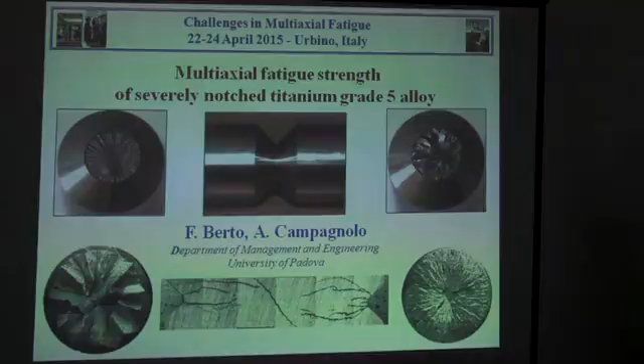The title of my presentation is Multiaxial fatigue strength of sharp-notch specimens made of titanium. I would like to say that this work was started under the supervision of Professor Paolo Lazzarin, who was my supervisor during my PhD, and also my chief when I worked at the University of Padua. He is in collaboration with the last PhD student of Professor Lazzarin, Alberto Campagnolo.

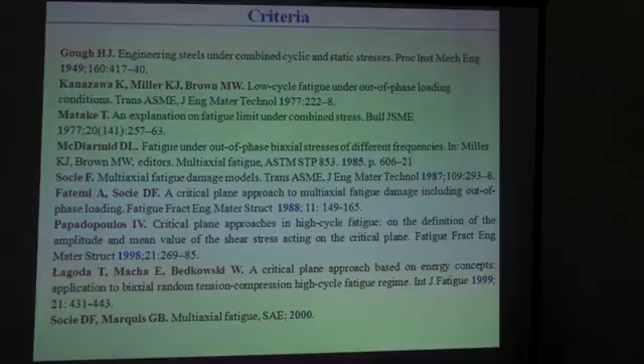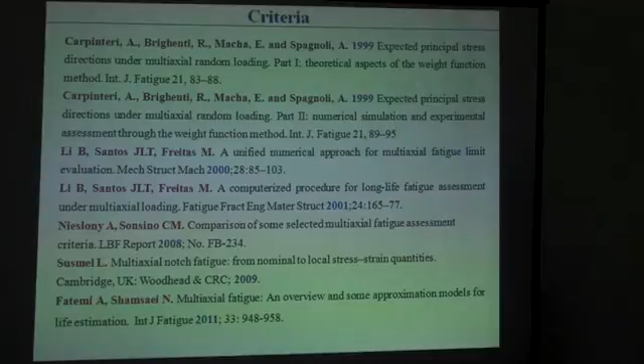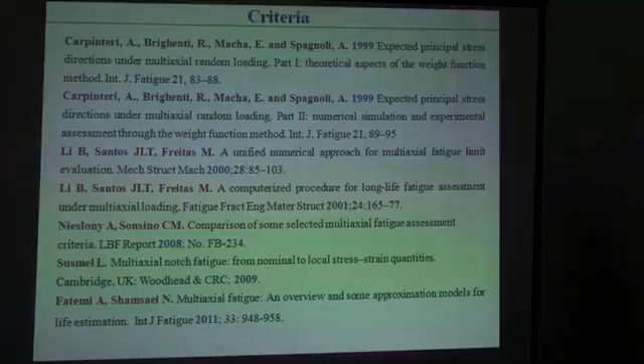Dealing with multiaxial fatigue, we have different well-known criteria, very famous and applicable to different kinds of components. I have summarized here the most known, but I have probably forgotten some others. There are also recent publications by Carpinteri, Santos, Freitas, and other authors that have shown the possibility to have a fatigue assessment under multiaxial loading conditions with different combinations of loads.

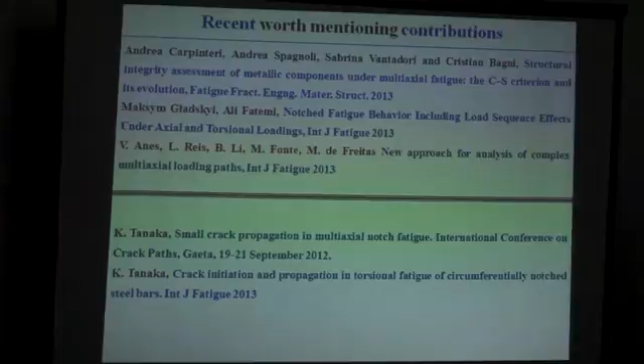In particular, I would like to mention these five contributions. The first due to Andrea Carpinteri, the second due to Ali Fatemi, very recent, and another one very interesting by Professor De Freitas.

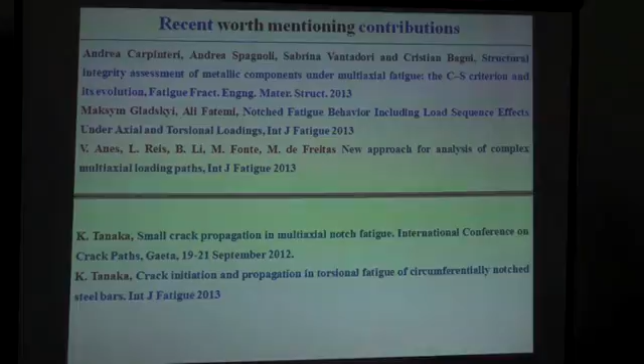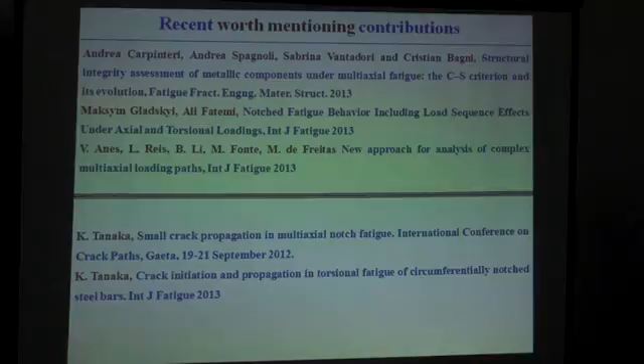Adding to this, there are also two very important contributions, in my opinion, due to Professor Tanaka, who has shown that there are some cases where crack propagation is very important, and we have an increase of fatigue life studying notched specimens in comparison with plain specimens. It is a very strange phenomenon called notch hardening, which is very well explained in these two papers.

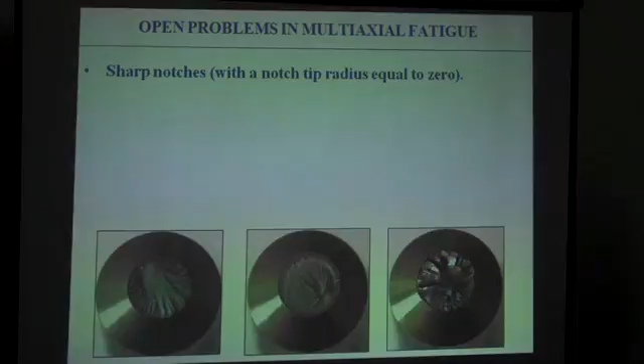Dealing with open problems in multiaxial fatigue and with our main topic of research, which is also the aim of this presentation, is the study of sharp notches, in particular with the notch tip radius equal to or tending to zero.

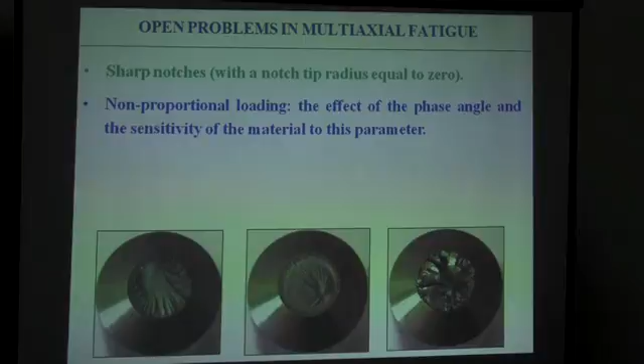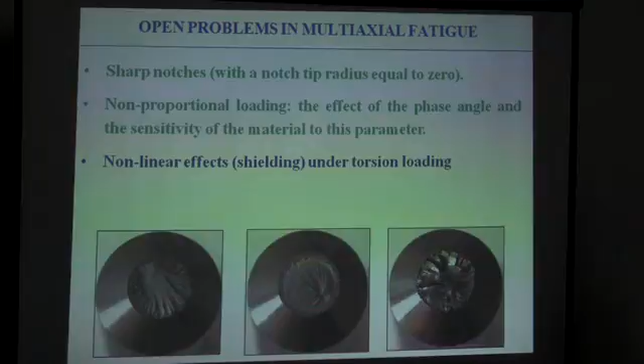Another important aspect is how to take into account the non-proportionality for this kind of sharp notches. For this kind of geometry, as discussed by Professor Tanaka, we have nonlinear effects, a shielding effect in particular under torsion loading, when we have a nominal load ratio equal to R=-1.

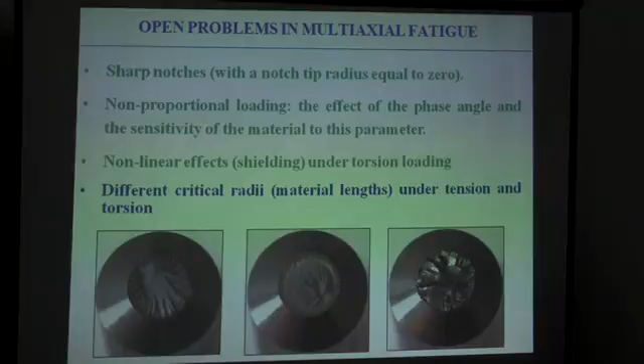For our particular criterion, which is the strain energy density - I'm a bit sorry to present this criterion after the words of Professor Socie, but anyway I will try. There are different critical radii for us under tension and under torsion.

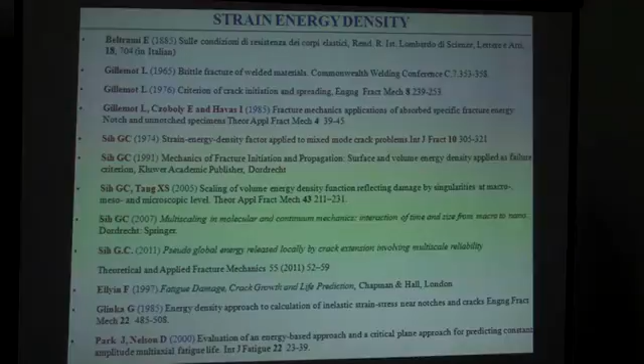Dealing with the strain energy density, we have also some good contributions. The first to use the criterion was Gillemot in 1965. Previously, an Italian researcher, Beltrami, proposed the total strain energy density as a fracture assessment parameter, and later there were very important contributions due to Glinka, Park, and Nelson.

Dealing with the advantages of the local energy approach based on the NSIFs, we can mention different advantages. I know that there are also different drawbacks of this approach, and I will discuss these drawbacks as well.

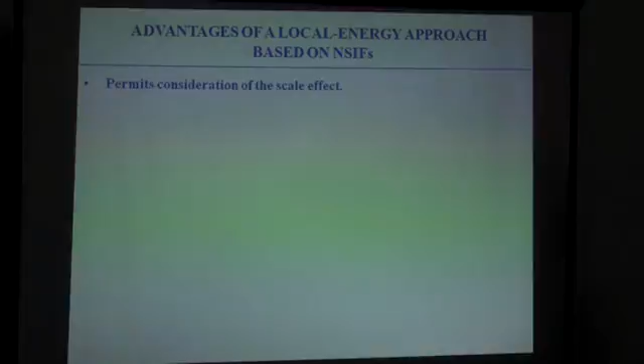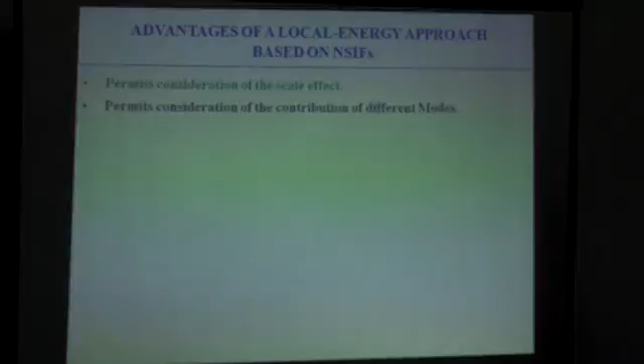The strain energy density allows us to consider automatically the scale effect of a component and permits consideration of different modes. For example, as we do in this paper, consider the combination of mode 1 and mode 3, and permits consideration of the effect of the nominal load ratio. You will see how to do this.

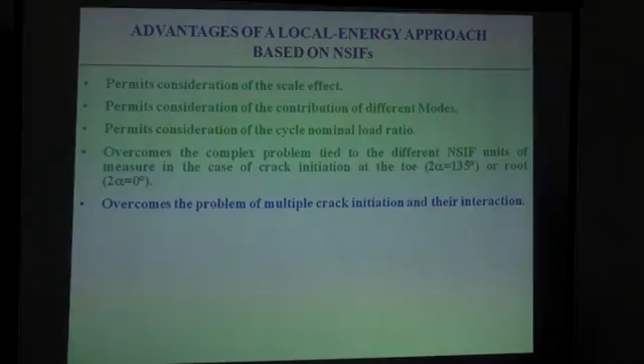In some cases it overcomes the complex problems tied to different notch stress intensity factor units when comparing crack initiation or notch initiation, for example when considering welded joints, but this is also valid when comparing different kinds of notches. In some cases it overcomes the complex problem of multi-crack initiation and their interaction.

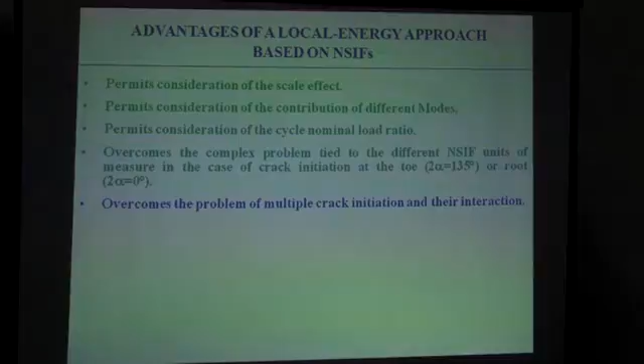This is valid only if we are thinking of a criterion for fatigue assessment, not if we want to study the crack propagation path.

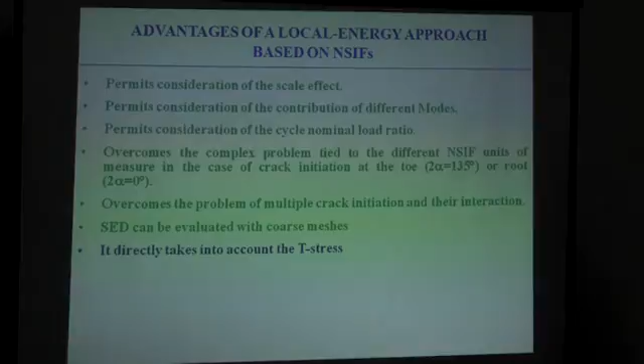It can be calculated with a coarse mesh, and this is a strong advantage compared with the notch stress intensity factor method, which requires a fine mesh for the calculation. It directly takes into account the T-stress if we consider a volume of material able to capture this effect, and in three-dimensional problems, it is able to consider the constraint effect combined with three-dimensional effects.

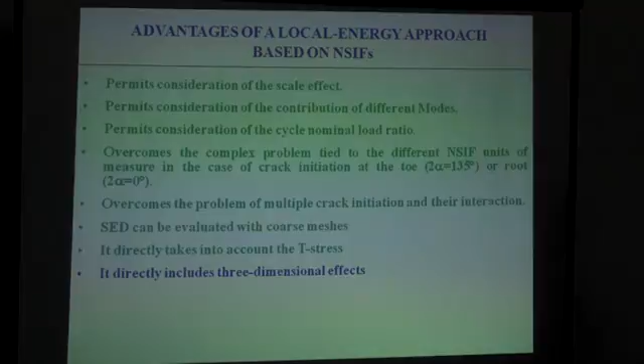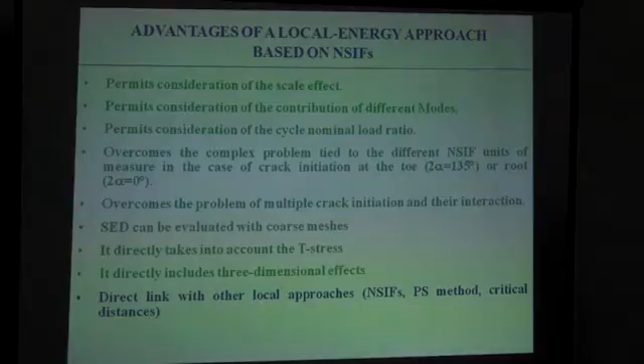And so coupled modes, which we discussed in the previous workshop dealing with fatigue crack propagation - there is a direct link with other local approaches as discussed in the previous workshop, where we discussed, for example, the link with the peak stress criterion.

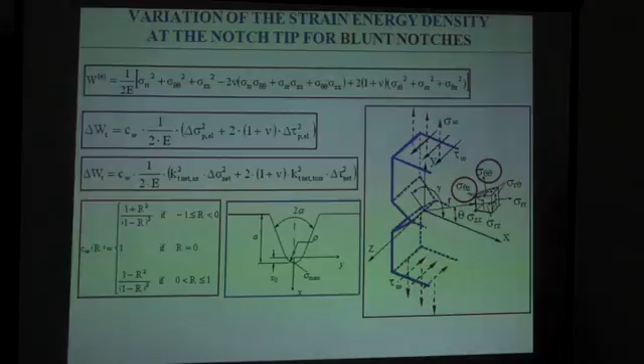Dealing with the analytical background, I don't want to bore you too much with this part, but the strain energy density has the advantage that it can take into account the nominal load ratio with the parameter called CW, introduced by Lazzarin and Sonsino in 2004.

This parameter is equal to 1 when we are considering an external nominal load ratio equal to 0, and 0.5 when we are considering a nominal load ratio equal to -1.

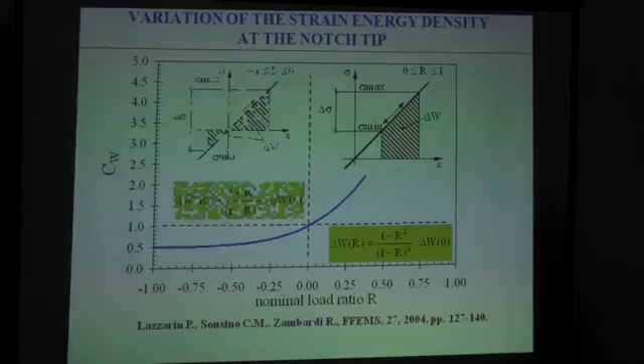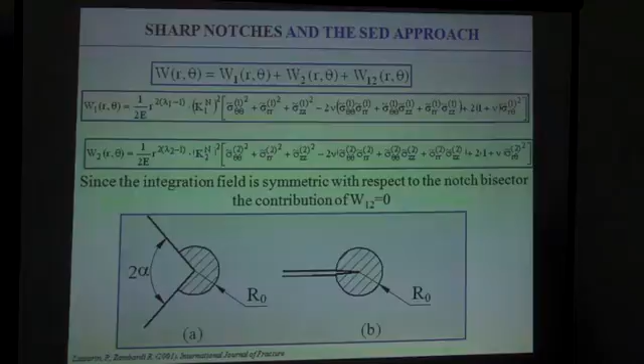Dealing with the strain energy density, our criterion is based on the definition of a control volume around the notch tip or crack, and what we do is average the strain energy density inside the volume, considering all the components.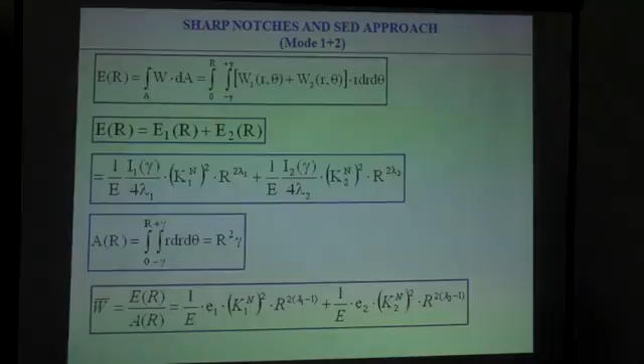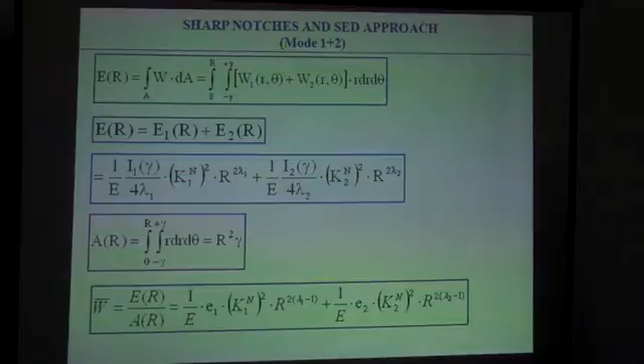After simple calculation, we arrive at the final equation reported in the slide, where we can express the average strain energy density as a function of the notch stress intensity factor of mode 1 and the notch stress intensity factor of mode 2, when considering in-plane shear stress.

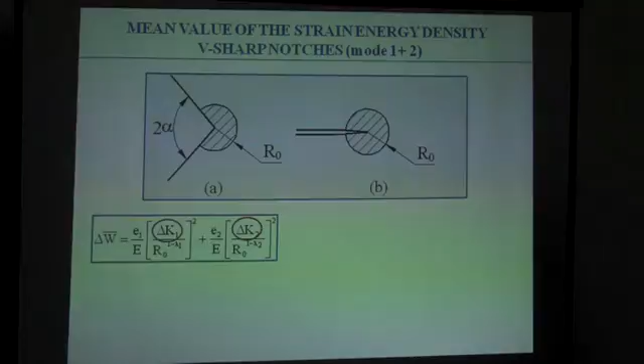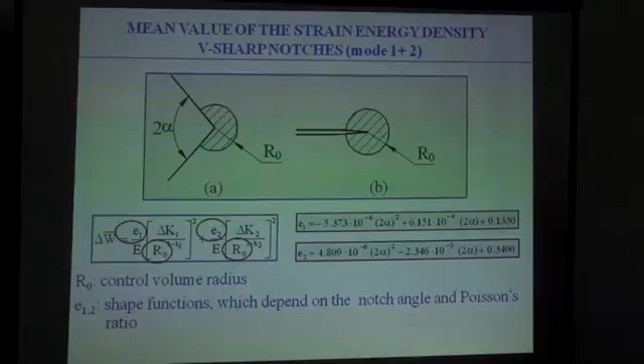It is easy to evaluate the range of the strain energy density considering the range of the notch stress intensity factor. In particular, we have simple equations providing the shape functions e1 and e2, linked to the notch opening angle as a function of the Poisson's ratio. These equations are valid only for a Poisson's ratio equal to 0.3.

Extending the criterion to multiaxial fatigue, we can introduce mode 3 loading into the equation. In the present work we consider only mode 1 and mode 3. We have a simple table reporting, for each notch opening angle, the values of e1, e2, and e3, which allows direct application of the equation.

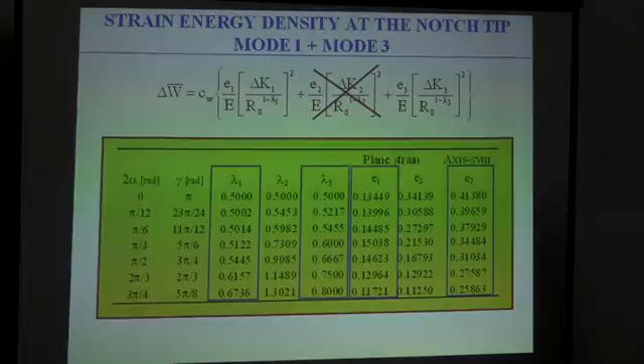The problem I would like to discuss today is that under combined tension and torsion, we usually have an issue with this criterion because we have different critical radii for mode 1 and mode 3 loading. An example is shown when we discuss the data from the present research program.

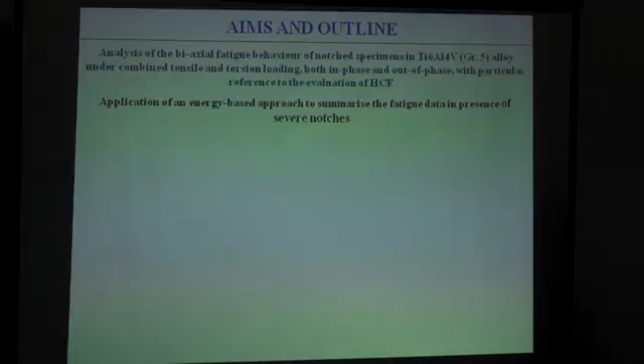The experimental validation reported in this work considers the fatigue behavior of titanium alloy grade 5 under combined tensile and torsion loading, both in-phase and out-of-phase. We considered plain specimens, torsion and tensile fatigue tests, and also combined tensile-torsion fatigue tests on notch specimens, very sharp specimens with a notch radius less than 0.1 millimeter.

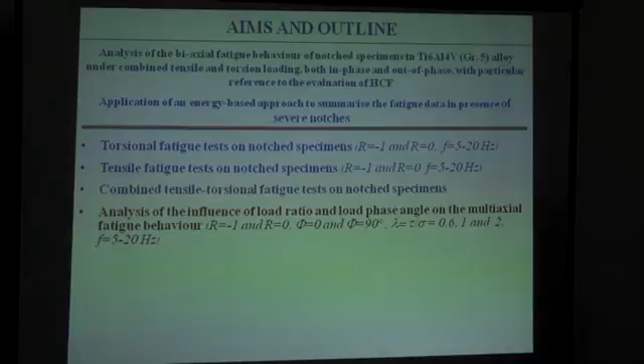Now I will show the imaging of the specimen, and we would like to see if it is possible to achieve a good final synthesis by using the strain energy density approach.

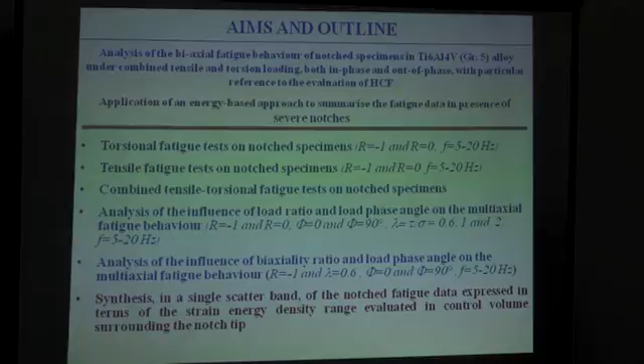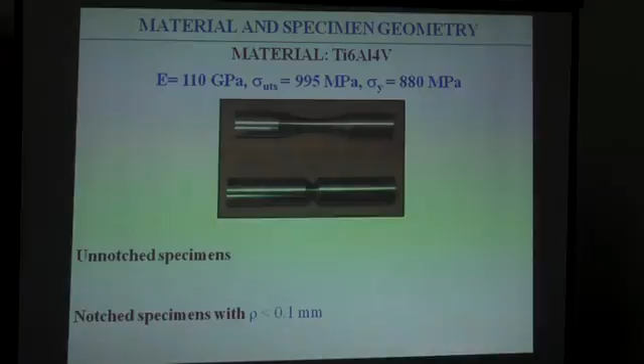The synthesis of the data from titanium alloys is reported here. We considered a plain specimen and a notch specimen with a notch opening angle equal to 90 degrees and a very small notch tip radius, less than 0.1 millimeter. This is an image of the notch radius, and this is a typical measurement of our radius.

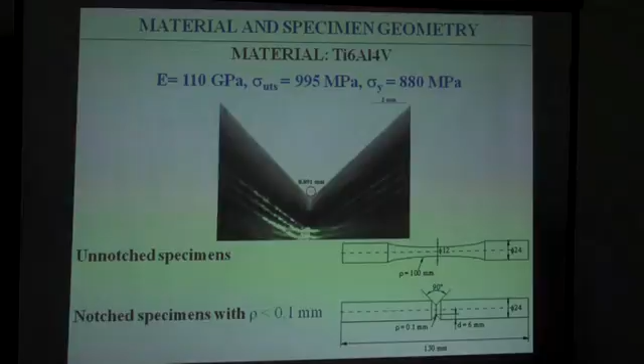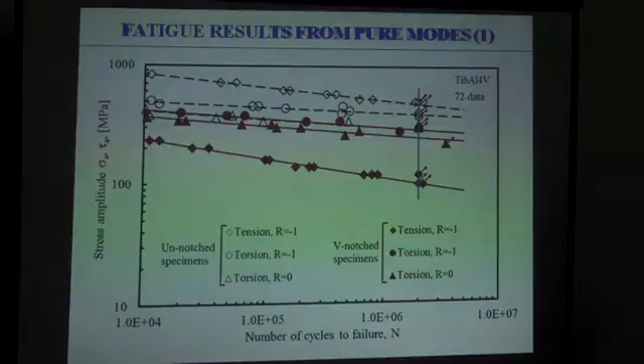After that, we collected data for different loading cases, in particular considering tension, pure tension, and pure torsion cases with notched specimens and unnotched specimens.

After that, for example under torsion, we changed the load ratio from -3 to 0.5, and we observed a very strong effect of this nominal load ratio also under torsion loading for this material.

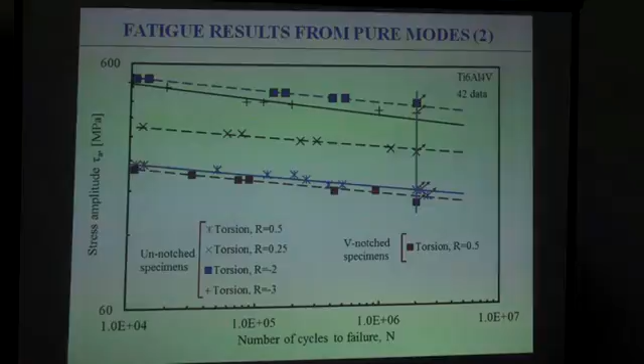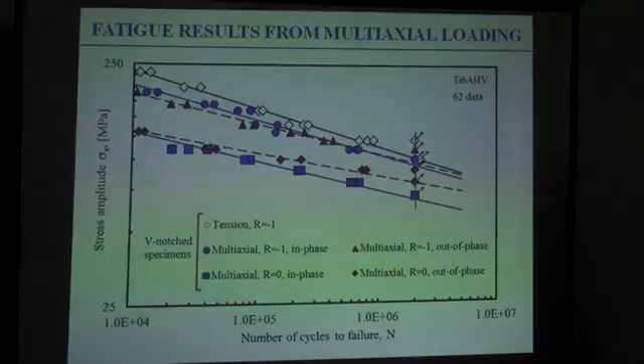We also considered multiaxial fatigue tests, combining tension and torsion with a biaxiality ratio, the ratio between shear stress and tensile stress, equal to 0.6. These data show very large scatter and different behavior under different mode combinations.

We have summarized all the data. What is interesting to understand is that for this material, the effect of out-of-phase loading is quite limited. In fact, comparing the cases R=-1 and R=0, we obtain almost the same fatigue strength in both cases, with no strong reduction due to out-of-phase loading.

After that, we also examined the fracture surfaces of the specimens to see if there were differences between in-phase and out-of-phase fracture surfaces, and yes, we found some different behavior.

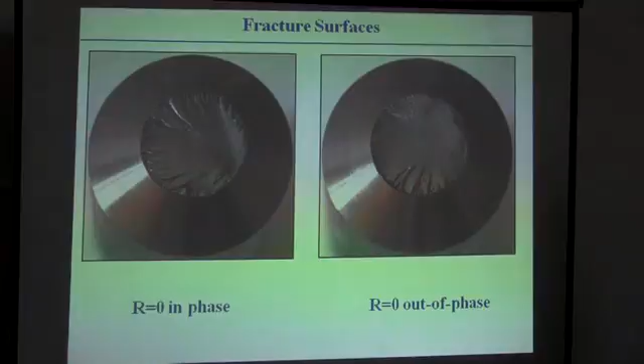For example, here there is some fretting fatigue, or the specimen seemed to produce a kind of debris during the test, but finally this different behavior does not provoke a very strong reduction in out-of-phase loading. The same happens for the other load ratios considered.

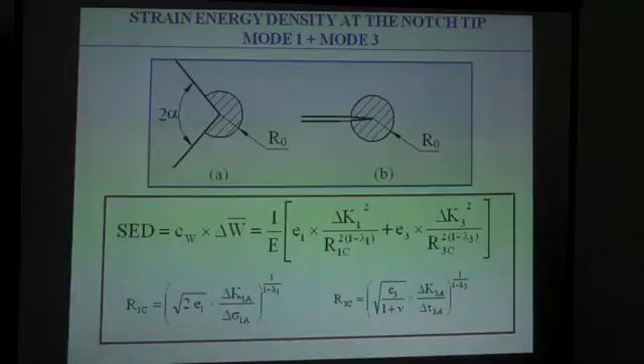We have not found a strong difference between in-phase and out-of-phase loading, and we have applied our criterion to this material, considering the equation shown before.

And in particular, for plain specimen, we use directly the Beltrami expression, and for V-notched specimen, we use the strain energy density in the control volume.

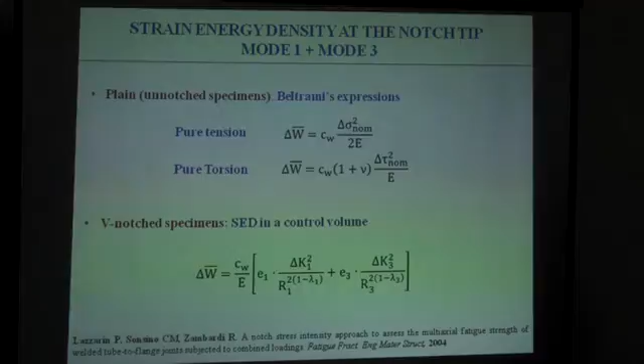Before applying the criterion, we have to evaluate the critical radius for the two materials. What we have found is that the two materials have very different critical radius.

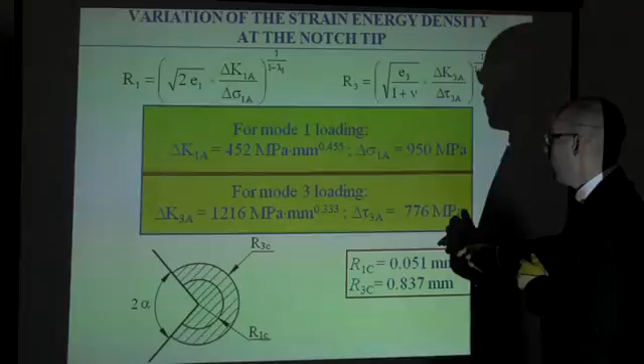These critical radius are linked to the critical stress intensity factor under mode 1 and mode 3 loading, and this information derives directly from sharp notches. This information is the stress range of plain specimens.

So this information comes from unnotched specimens. As always we do when we apply the strain energy density, we compare the strain energy density of very severe notches and on the other hand the strain energy density of a plain specimen.

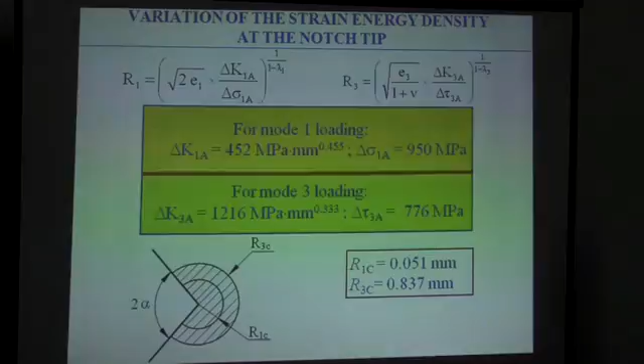To evaluate the critical radius, we have to equate the two equations, which come from two pieces of information: the information from sharp notches and the information from unnotched material.

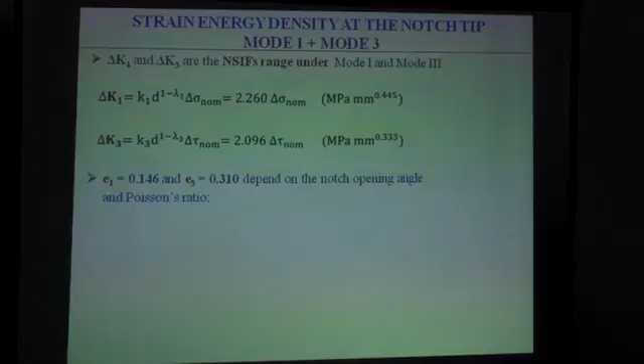All the analyses are made under a linear elastic hypothesis, so I can also obtain some simplified expression to express delta K as a function of, for example, the notch depth of the specimen, according to some useful expression proposed in 1998 by Professor Tovo and Lazzarin.

And again, I'm able to calculate the two sizes of the volumes. It is also important to show that for our geometries, the critical radius, which is equal to approximately 0.8 millimeter, is inside almost the linear elastic zone for the considered geometry.

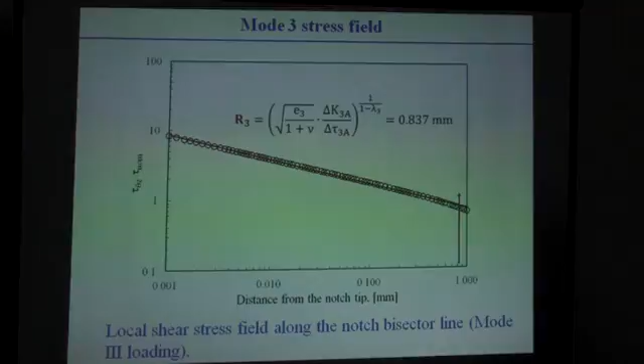Applying the criterion, we can summarize. We were able to summarize all the data from notched materials inside the scatter band. We have almost 90 data from different combinations of loading.

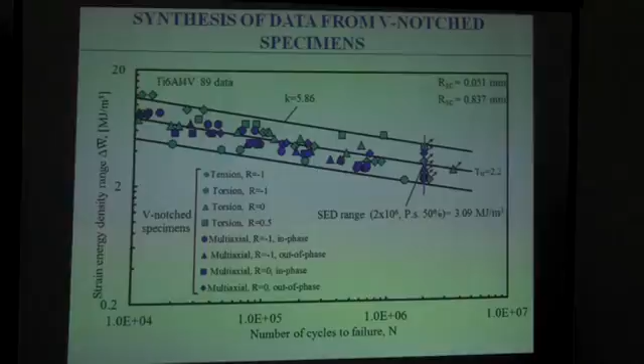This is the synthesis only of the notched materials, and the scatter band, in terms of the strain energy density, is 2.2, so it compares very well. If we want to obtain a stress scatter, we have to take the square root of this value, so it is a very low value.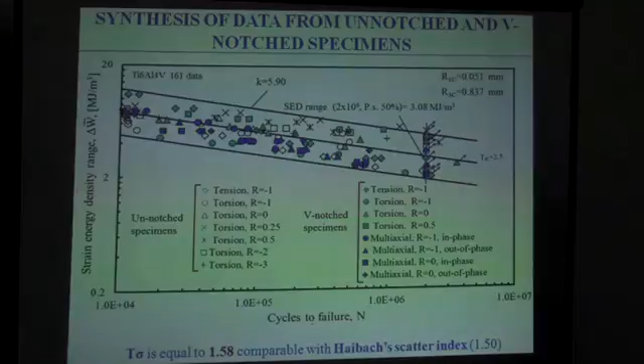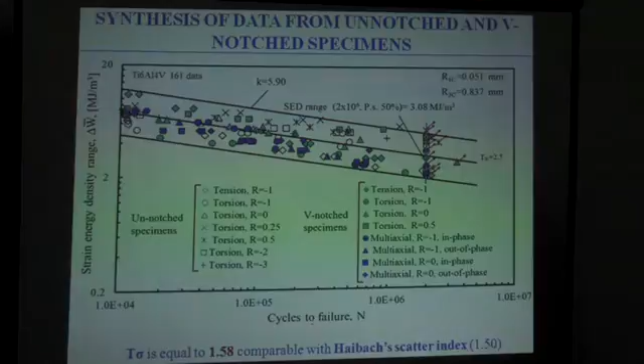Considering all the data together, we have approximately 160 new results with a scatter band which, if we convert in terms of stresses, is equal to almost 1.6, which is comparable with usual fatigue scatter bands.

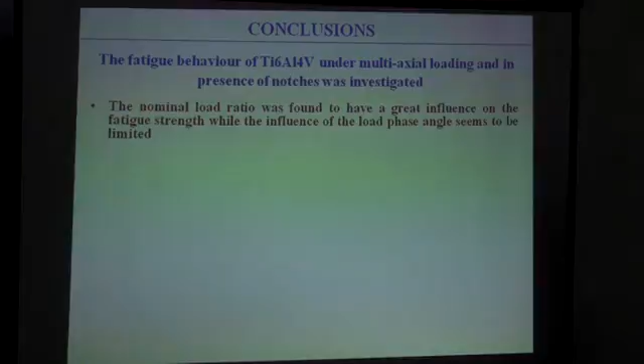In conclusion, we have considered different combinations of load for titanium alloys. The nominal load ratio was found to have a great influence on the fatigue strength, and the effect of phase angle seems to be very limited.

The reanalysis of the fatigue data in terms of the strain energy density range at the notch tip allowed us to summarize the data inside the scatter band.

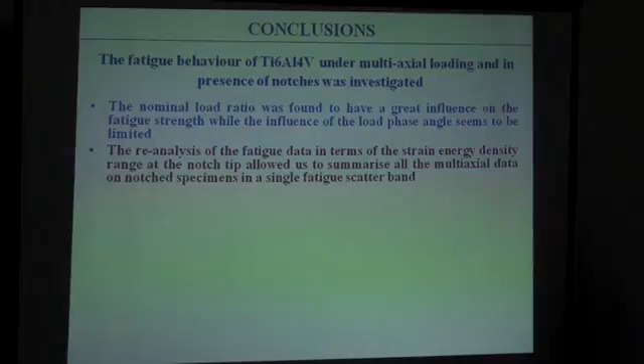We have a problem with the definition of the control volume. Under the linear elastic hypothesis, we have two different control radii for tension and for torsion. This is a possible problem.

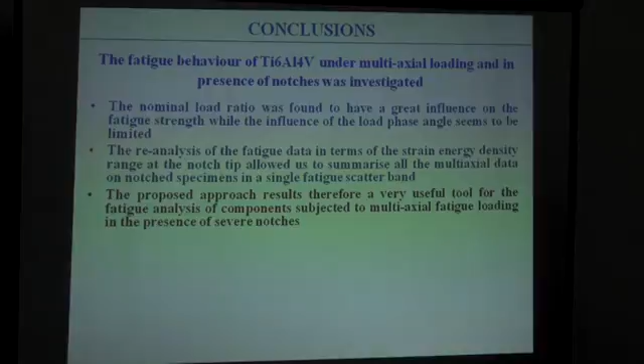Our criterion is not able to take into account the out-of-phase effect, because in this case the material is not sensitive to out-of-phase loading, but if we have a strong effect due to out-of-phase loading, this criterion as applied here is not able to take that into account.

It was possible to obtain a very good synthesis of the new results.

Now in progress we have a different series with different biaxiality ratio and intermediate values of the phase angle. We also change the geometry of the notch to see if the phase effect is tied not only to the material but also to the notch geometries.

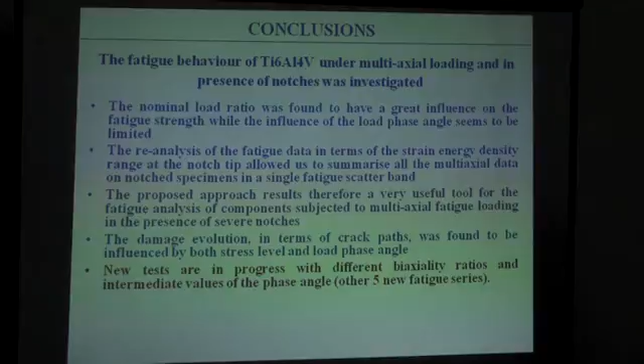Finally, I would like to say that the main part of the results is reported in a review we have published with Professor Lazzarin in Material Science Engineering A, and I would like to thank Professor Lazzarin for his contribution.

I would like also to share his last sentence, because Professor Lazzarin was a great teacher and many of us had the luck to meet him. I think this sentence represents the message of his teaching.

I think that the two most beautiful papers by Professor Lazzarin, in 1996 and 1998, were written with Professor Tovo, and I would like to give this message to show our appreciation for this great man.